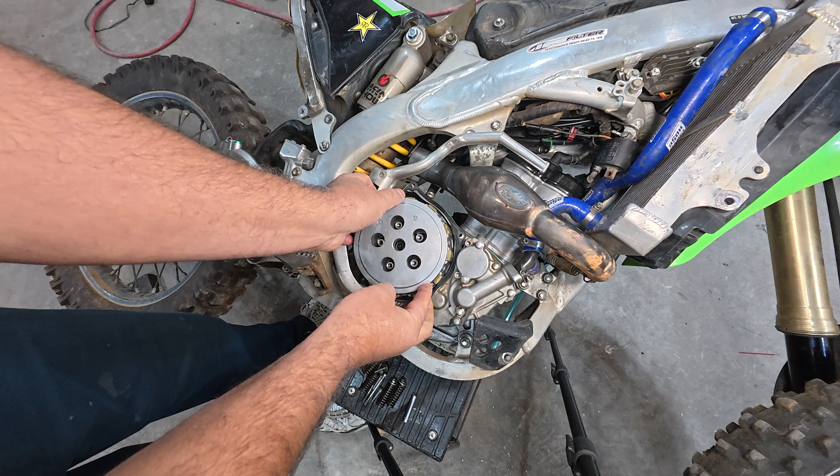One of my viewers made a comment that I had potentially forgotten a washer between the outer pressure plate and the thrust bearing in here. So we're going to get back in and take a look. And he is 100% correct. That's awesome. I really appreciate you paying attention enough to catch that, since I didn't.

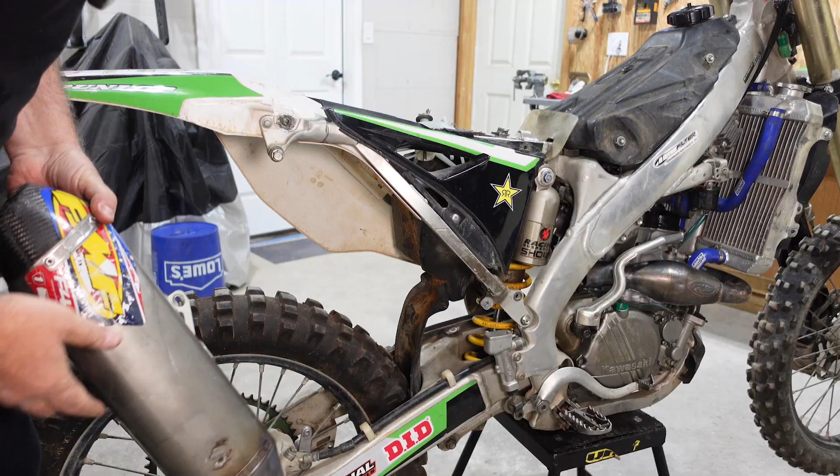Looks like it's a good time to get back on our 2014 KX250F project and get this thing finished and ready to ride. As far as I remember, mechanically she's good to go, so time for the cosmetic procedure. First things first, I had a header pipe and the FMF 4.1 muffler, no mid pipe. Can't buy it separately anymore through FMF, and it's difficult to get one. So I ended up getting an OEM muffler, and we're going to hope that that fits. I got a pretty good deal on this, so I'm happy. Hopefully this fits with my header. And it does. That's awesome.

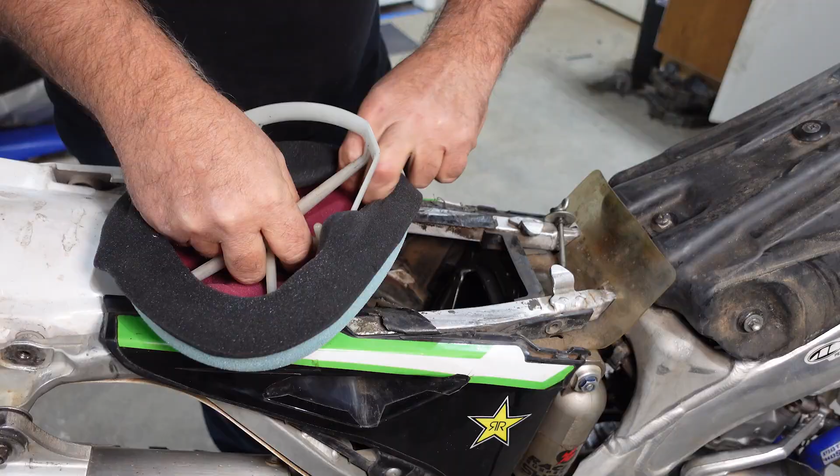Now that I got a full exhaust on it, I want to go ahead and see if this thing will start up and what it sounds like when I can actually hear the engine running.

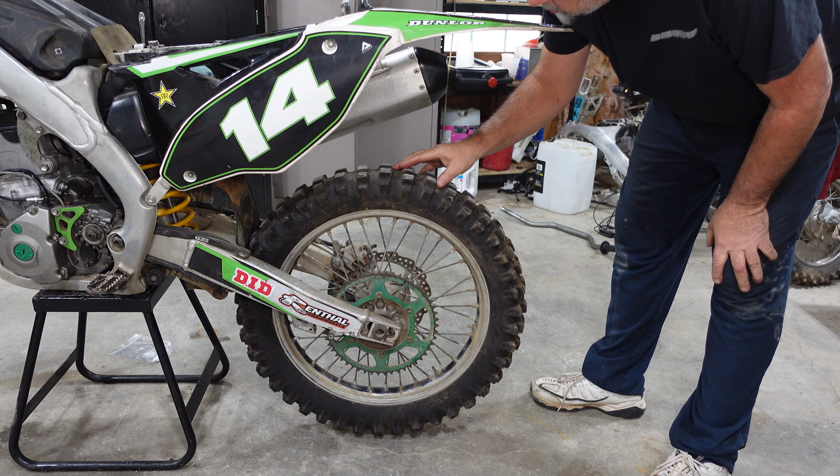Good deal, she sounds real good. Let's keep going. So I was going to change the rear tire out, but I've come to the conclusion that it's good enough. But I am going to take it off and replace this rear sprocket and the chain. Just noticed I do not have an adjuster here. I don't know if it fell out or it's broken. I'm sure I've got one lying around here somewhere that'll work.

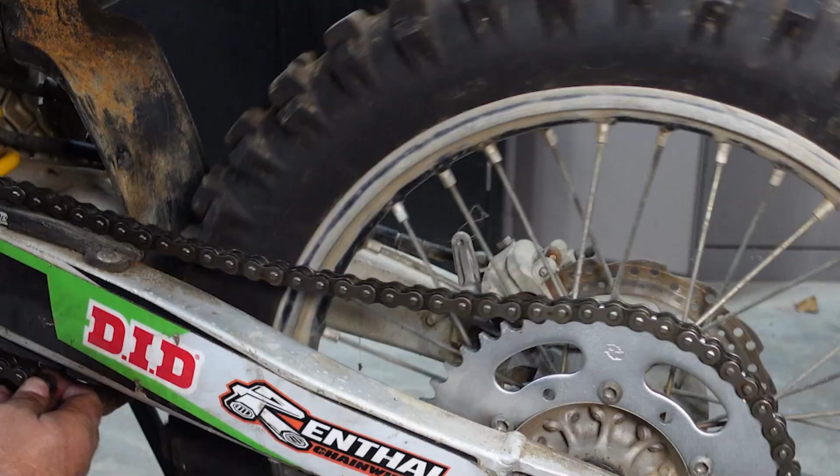Before I go any further, when I had this thing running, I noticed that the FI light on the old dashboard here was lit constantly. That's telling me there's an issue with the digital fuel injection system of some sort. Now, the bike seems like it runs pretty good, but there's obviously some kind of issue. So we're going to have to get into diagnostics on this.

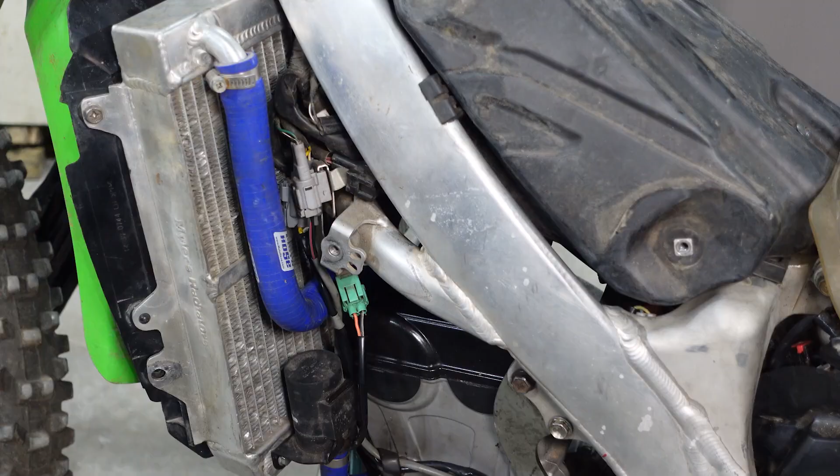If the bike's not running, we need to get a 12-volt power source to the bike. The first thing we want to do is disconnect our capacitor. What we want to do is hook 12 volts up to this to power up the system. Keep in mind the orange wire is your positive and the black wire is your negative. Then we can continue with diagnostics from there. However, this bike does run and I can get the power source from the bike itself, so I'm going to leave this connected.

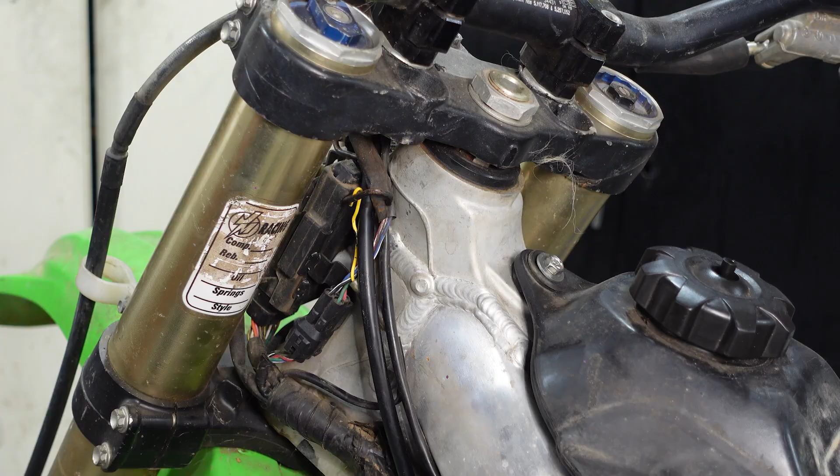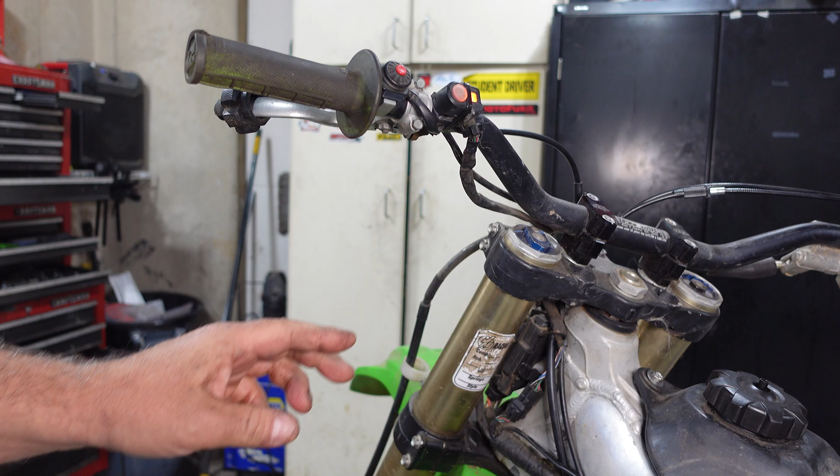Once you have your power source connected, we want to come up here to the neck of the frame, and there's this yellow wire. What we want to do is go ahead and ground this to the frame. You're going to hold it for a couple of seconds, and then we're going to observe our FI light. If there are any codes, this light should blink the codes for us. Let's take a look at it. As you can see, our light is on steady. What we're going to do is go ahead and ground this and hold it, and we want to see what we got for blinks.

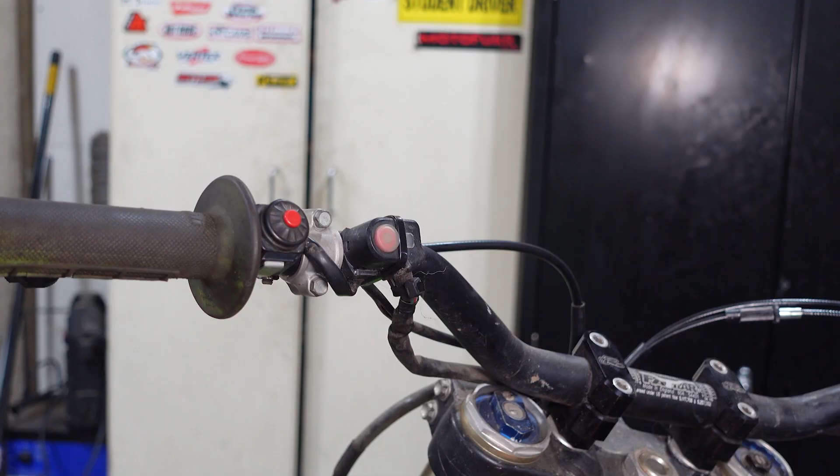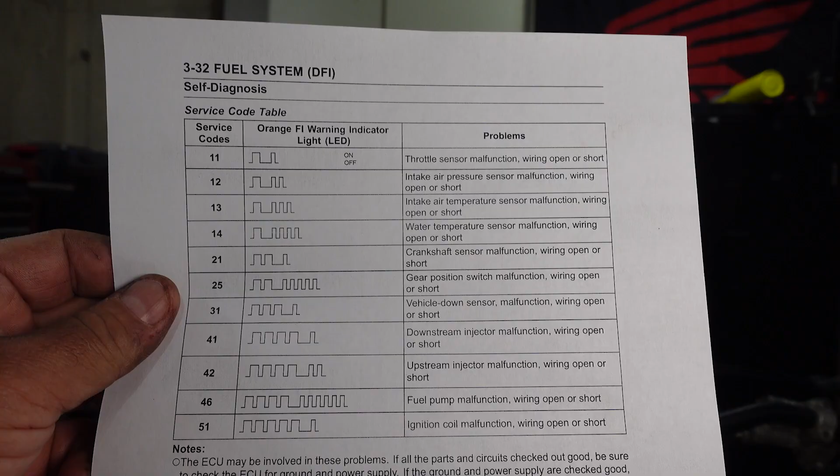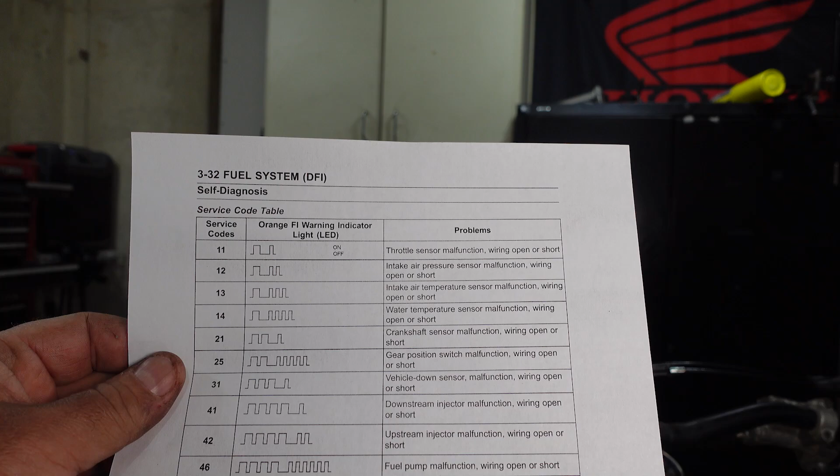We definitely want to hold this for a few seconds because we want to make sure if there's more than one code that it flashes every code. What we got here was one long, one short, and it repeated that over and over again. So let's take a look at the service manual, the diagnostic trouble codes, and see what they say for that. If we look at this chart, service code one long, one short is service code 11, telling me I have an issue with the throttle sensor, a malfunction with either wiring open or short, or the sensor itself has failed. We'll have to get into some diagnostics on that before we put anything else together here.

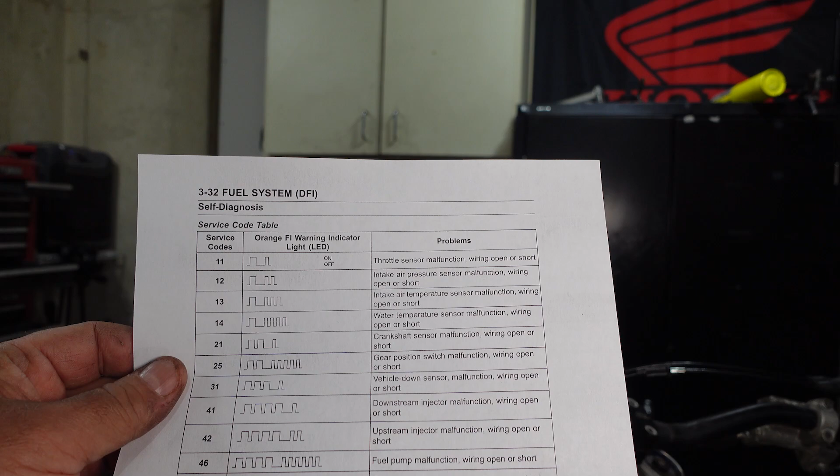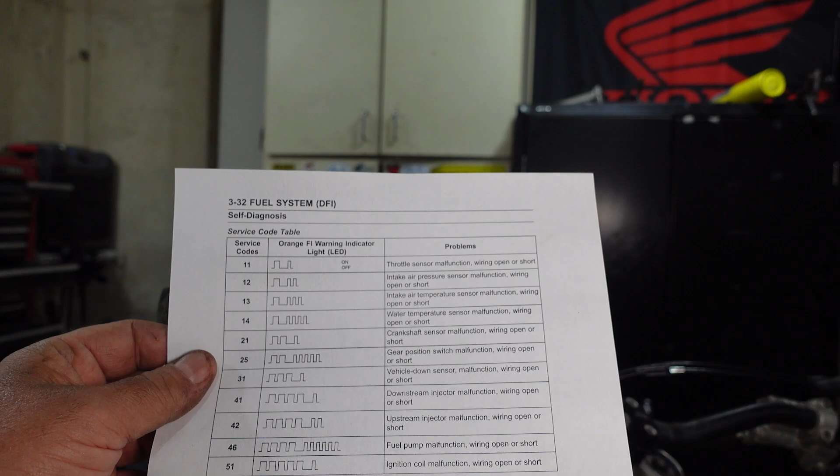I'm not going to get into diagnostics here on this particular build. I'm going to go ahead and just fix whatever the problem is. Basically what you want to do is just follow your manufacturer's recommended diagnostics for your particular bike and figure out where your problem is.

All right, so we got our diagnostics done on our running issue and nothing to fear. It was basically just because this thing had been sitting outside for a while. The connection had a little bit of corrosion in it. We cleaned that up, it's good to go. Lights off, she runs great now. So I'm going to continue to get this thing cleaned up. We'll get some grips on it, some new levers. I got all new plastics and graphics for it.

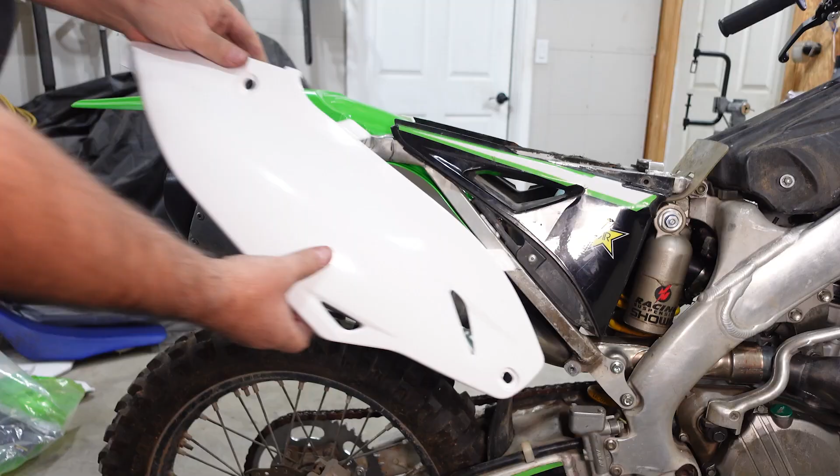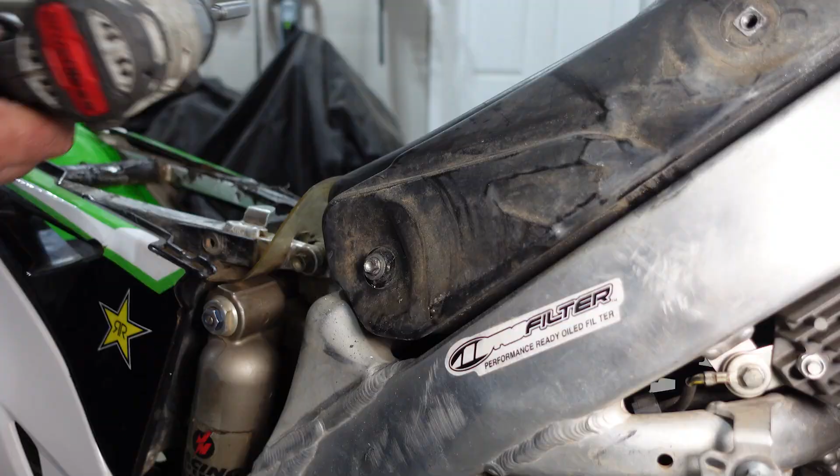So unfortunately, we got a bolt that's stuck in this little nutsert that fits in this tank here. We're going to have to fix this, and the best way I'm going to be able to do this is spin this up until it gets hot and then pull it out with my pliers. Once I can separate it on the bench, I can JB weld this nut back in, or JB weld another nut in to fix this problem.

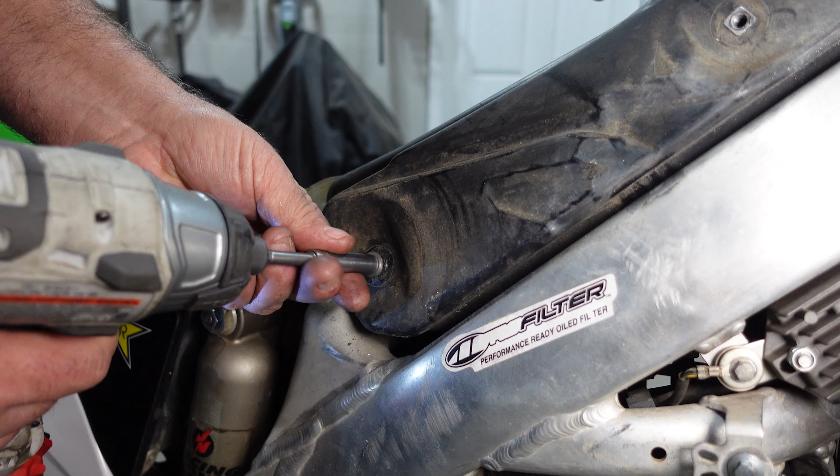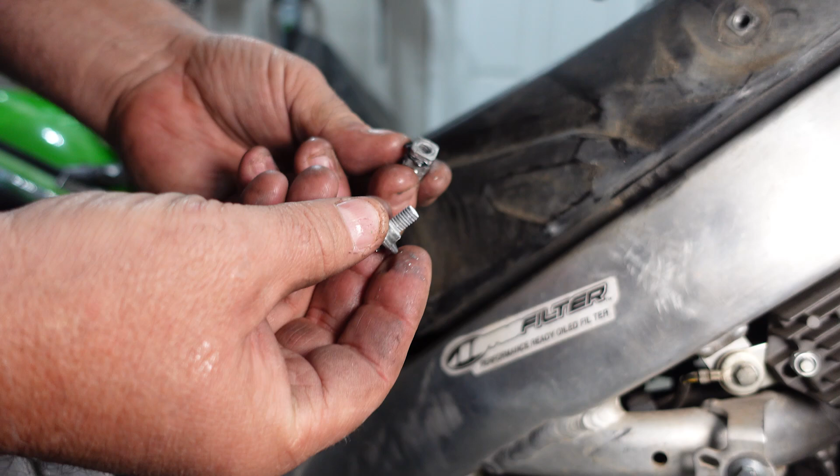Spinning this creates friction and heats it up, so I can pull this out of the plastic. Now I'm going to take this over to my vise and see if I can get this bolt out to reuse this. If not, we'll have to use a different kind of nut setup. So putting it in a vise, I was able to get this out, and I'll be able to use this nutsert again.

First thing I want to do is get this cleaned up real well with some brake parts cleaner. I'm going to be real careful with it around plastic because it will make it hard and brittle, so we're not going to do much in the way of cleaning here. Next, I'm just going to take a long bolt, put some grease on the threads, so that the JB weld doesn't stick to the threads.

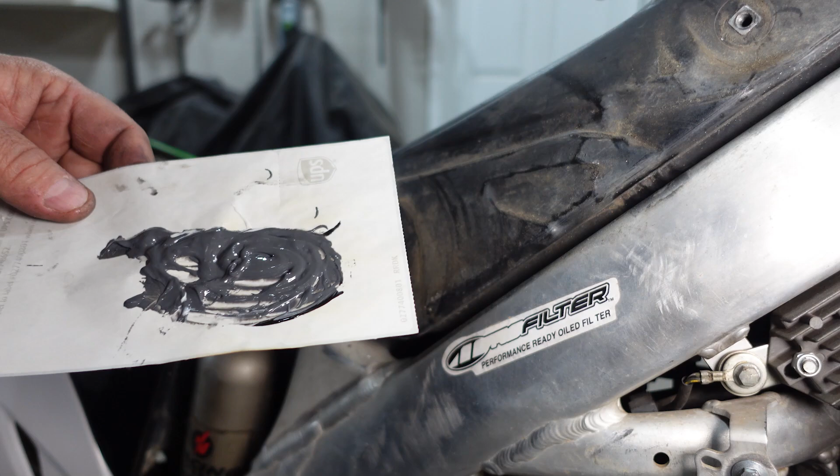All right, I got some JB weld mixed up here, nice and gooey. Now we have to remelt this plastic, and certainly not going to put a torch or a heating element of any sort on this plastic. So what I'm going to do is heat this nut up a little bit just so we can force it back inside there. A little more heat.

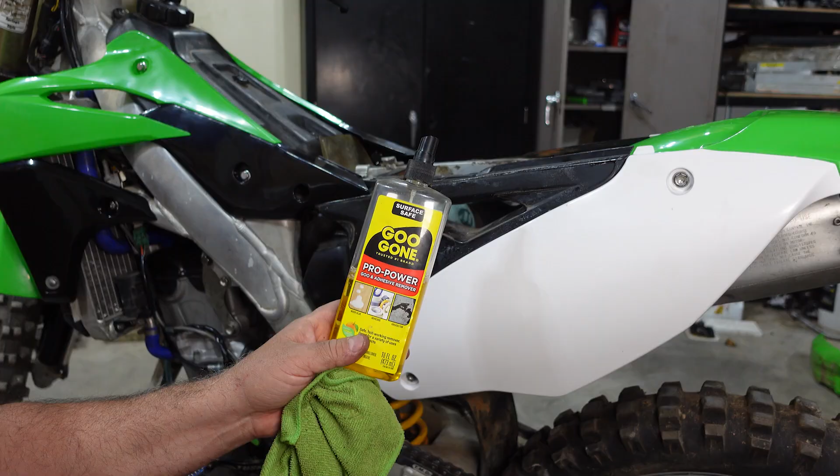I'm going to spray this down with a little bit of soapy water. The reason is these stickers are sticky and they will stick instantly, so with a little bit of soapy water we got a little bit of movement to get them looking just the way we want them to. And once you've sort of got it fit where you want, we're going to hit it with the heat gun.

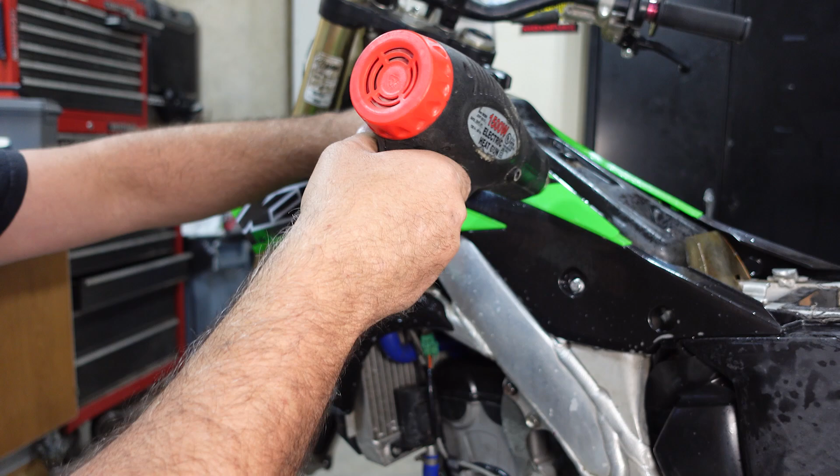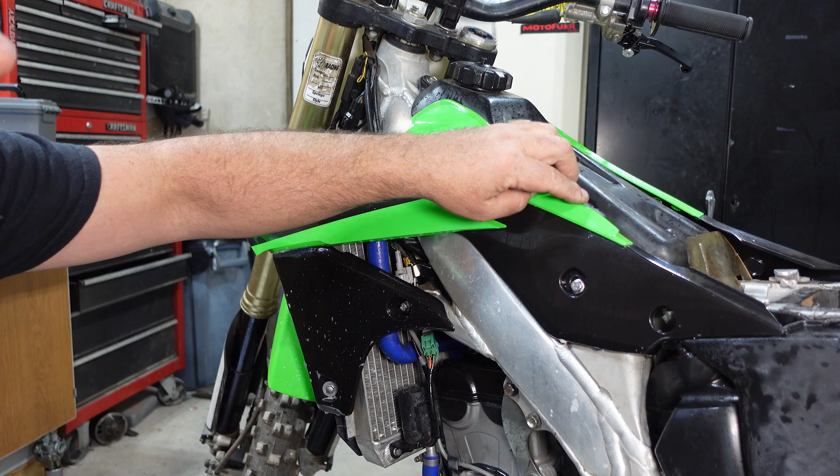It's going to allow these stickers to bend around all the corners and get into those little crevices, because they're pretty hard, so you're not going to want to go in there nicely unless you get some heat on them. You can use a hair dryer for this. Trick with this is just take your time.

They don't fully stick down right now, not a problem. As this dries up, we'll get a little bit more heat on them and then replace them where they need to be. Trick is just getting them lined up. I'm a big fan myself of factory-looking graphics rather than all kinds of fancy stuff, but this is going to work the same way no matter what kind of kit you get.

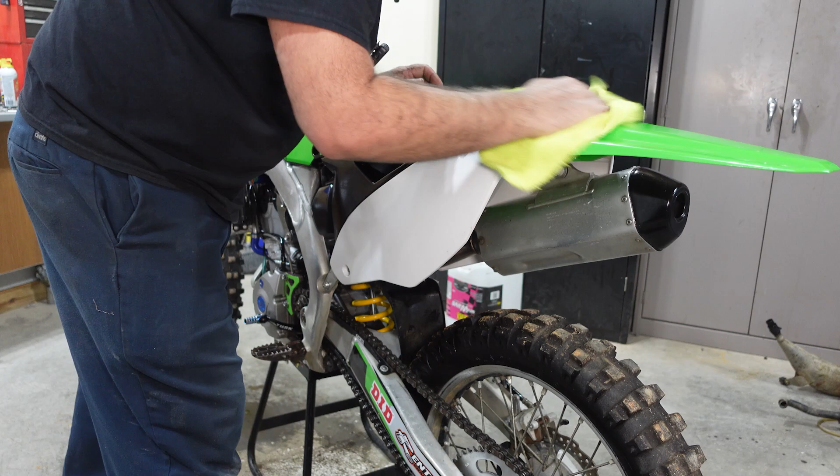We got her all shined up with the SC1 spray. This bike looks absolutely amazing.